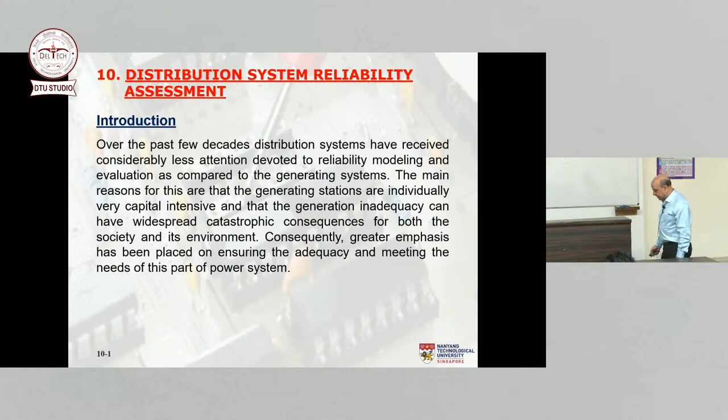Whereas in the distribution system, the outages are localized. Maybe 100 customers, 1,000 customers will be affected. But if there is an outage in generation or transmission, maybe millions of customers may be affected, if not the entire country. So that is a little bit understandable, but that's what has happened. Generation has been the focus of a lot of reliability studies for the simple reason that the outages there can have serious or drastic consequences. But we must realize that many of the outages come from the distribution system, particularly from the customer's perspective.

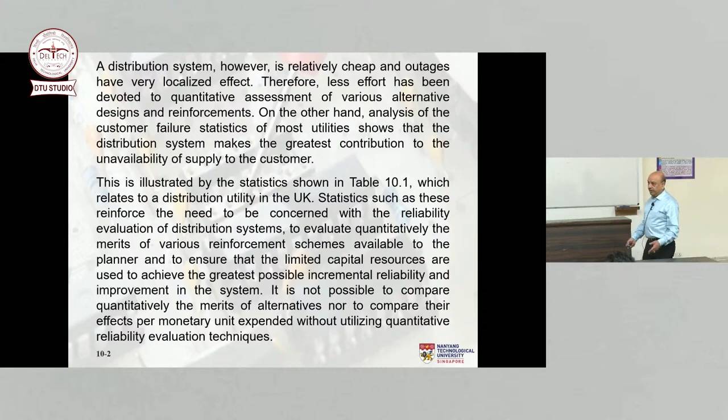So if you look at these statistics here from a utility in the UK taken some time back, you see that 11 kV and below is almost 87%, more than 87%. My own studies when I did during my PhD and a few years after that I continued in the same area, told me that more than 80% of outages in an electric power system come from distribution. Of course, I was using test systems, that's the difference, whereas this is a real system. So you can still see that it's more than 80%.

So from the customer's point of view, they don't care how you reinforce the generation, how you reinforce the transmission. They are only interested in whether they can get power from the utility or not.

So let's look at how we evaluate the distribution system reliability. That's going to be our focus this morning. Usually, most distribution systems are radially connected. Now, the radial system is probably not the most reliable, but it is the most prevalent, truth be told. Some systems are connected to a mesh or a ring. I will talk about that as well a little bit, but to begin with, we'll start with the radial distribution system. So it consists of a set of series components, including lines, cables, disconnects, bus bars, etc.

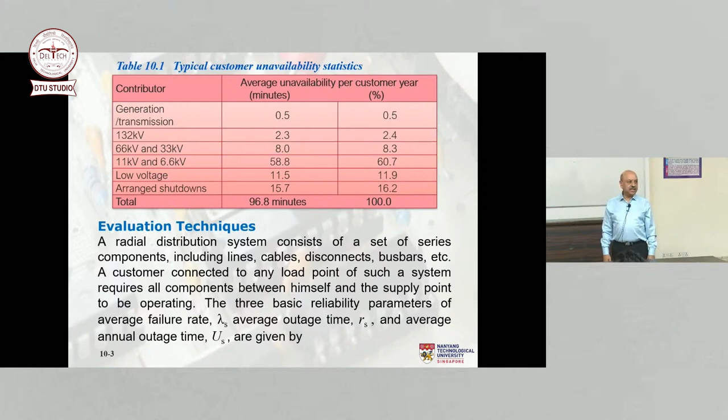So when components are connected in series, we have learned that lambda is equal to lambda 1 plus lambda 2 plus lambda 3, right? And then we can find the R and we can find the U, correct? If components are connected in parallel, we also have equations. We have learned all that in the failure modes and effects analysis, in the minimal cut set technique, and so on.

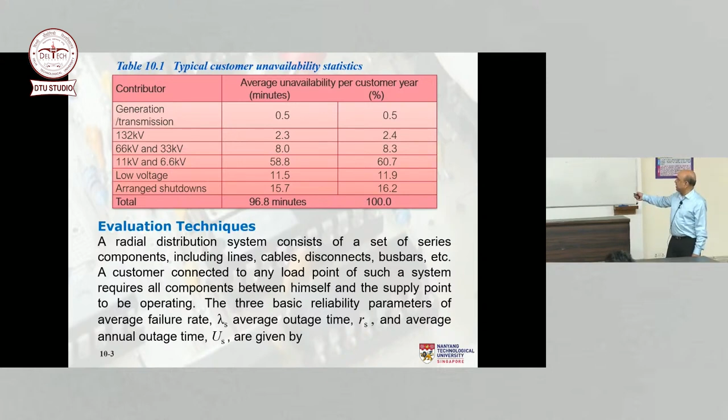So the three basic reliability parameters that we shall calculate in distribution systems, which are not really any different from what we do in generation systems, are the average failure rate, average outage time, and average annual outage time, also known as unavailability. That's why we use U. U stands for unavailability. So unavailability is the annual outage time. R is the average time, whereas this is in hours per year, this is in hours, right? So that's the difference between the two. And lambda is in failures per year or failures per period, depending upon the length of the study.

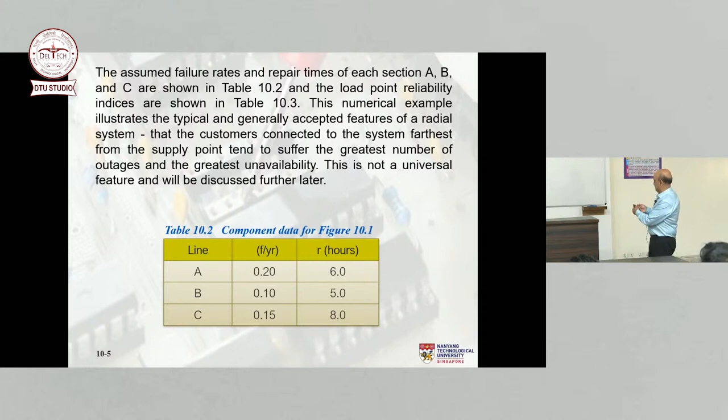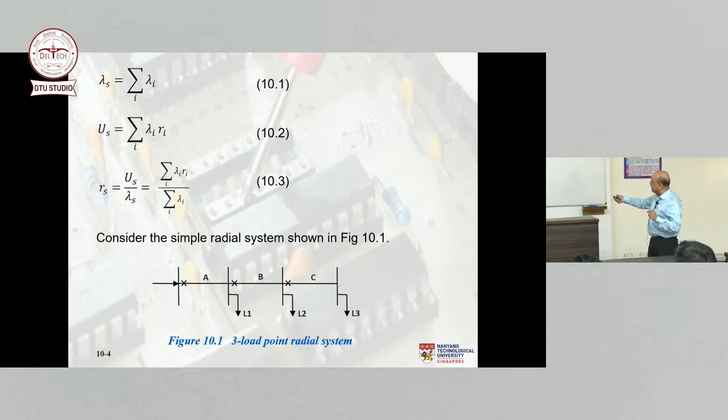Okay, now let's hope it will continue. So load point 1, I was talking about there is a fault here, then you need to repair. So load point 1 is out for 6 hours. It will not get power for 6 hours, correct? And how is it affected by failure rate? The failure rate is the same as the failure rate of component A. And the outage time is 6 hours. Therefore, the unavailability is 6 times the failure rate.

Now let's talk about the failure of section B. If this fails, this breaker will trip and it will not affect load point 1, correct? That means load point 1 can continue to be served. If there is a failure of component C, it will not affect load point 1 either. So load point 1 is impacted only by failures of component A. Load point 2 is impacted by failures in component A and B. And load point 3, poor guy, is affected whenever there is a failure in A or B or C. So the customers that are farthest away from the supply are the worst off. That's how the radial system works, because everything is in series, like we said.

So if we look at the... oh yeah, come on, another hour, just stay with me for another hour.

So the load point reliability indices for L1: 0.2 failure rate for section A, multiplied by 6 hours, the repair time of section A. So the unavailability is lambda times R. For L2, you have to add lambda A plus lambda B. That will be the effective failure rate.

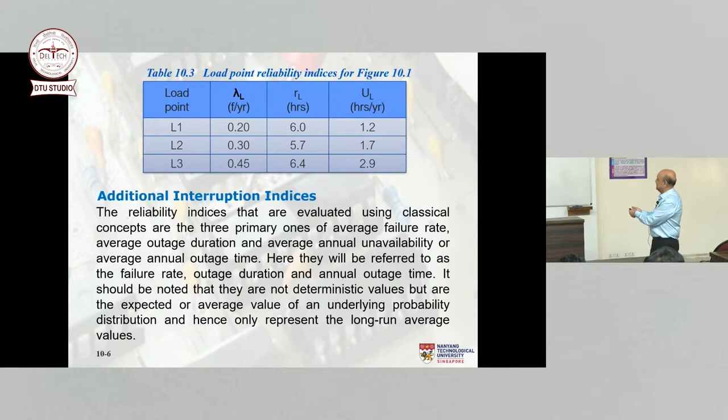And then the unavailability is... let's go back there, unfortunately. This is giving me trouble. Maybe we need to look at it. Probably a battery problem, but reliability, unreliability can come from anywhere.

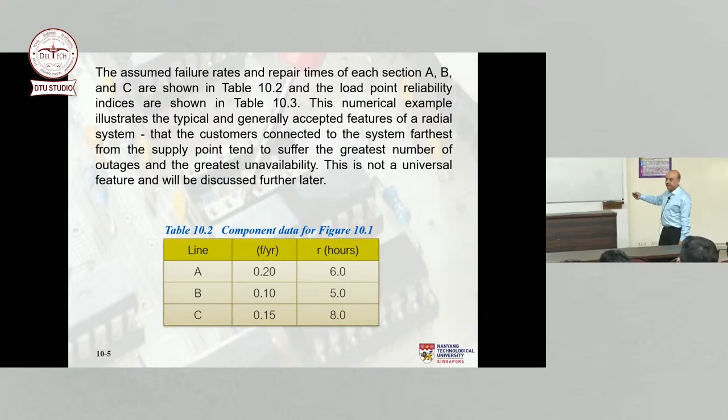Thank you. So for load point L2, what will it be? It will be 0.2 times 6 plus 0.1 times 5. The unavailability, so that's the number that you see here, 1.7. So 1.7 divided by 0.3 will give you the average outage time.

Similarly for load point 3, which is the worst, as you can see. Failure rate is the worst, total unavailability is the worst, as is the outage time.

So in general, when we deal with distribution systems, and some of you may be experts in power quality, you may have heard of indices like SAIFI and SAIDI. Have you? Anybody in power quality area? You have heard about those, right? Yeah, SAIFI and SAIDI are two of the most popular indices used in power quality as well.

So even in reliability of distribution systems, we use additional interruption indices, not just lambda, R, and U, but we also want to calculate additional indices. Why? Because you know the failure rate of load point 1, but does it tell you how many customers are affected? It could be one customer, it could be 1,000 customers, it could be 10,000 customers. Does it tell you how much load is interrupted? 1 kilowatt, 1 megawatt? It doesn't. So that's why we need these additional indices, which give us more information about the performance of the system. Those additional indices are defined here. There are two types: one is called customer-oriented indices, and the other is load-oriented indices.

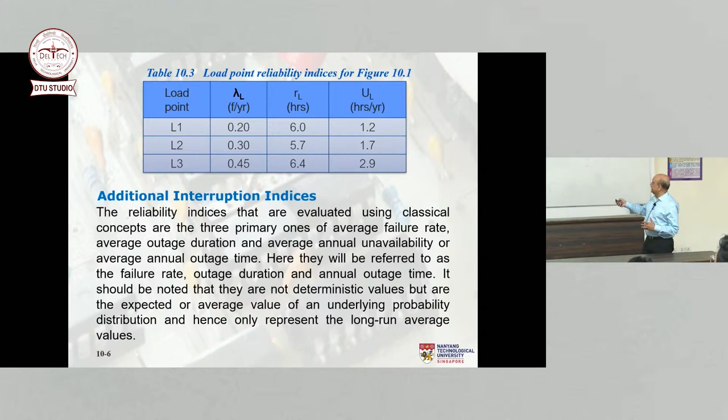SAIFI is the total number of customer interruptions divided by total number of customers served. This is for the system, for the entire feeder. When I showed you the indices of lambda, R, and U, these were for individual load points, L1, L2, L3. Now I want to find the reliability of this entire system, not just for L1, not just for L2, not just for L3.

That's where we come to customer-oriented indices. So total number of customer interruptions, which is lambda times n, where n is the number of customers at load point i, divided by the total number of customers in the system, in the feeder. That will give you SAIFI.

The other more popular one is called SAIDI, System Average Interruption Duration Index. Interruption duration—this one is interruption frequency. So this gives you the frequency, this gives you the duration. Remember, we have been saying from a customer's perspective, frequency and duration are much more meaningful. So here we have sum of customer interruption durations. This one is duration, this one is frequency. Remember, we also said that frequency is equal to lambda—we made that approximation somewhere along the line. So U times N divided by summation.

There is another one called CAIFI, total number of customer interruptions divided by total number of customers affected—not the total number of customers, but only those that are affected by those interruptions. CAIDI is defined like this, which is nothing but SAIDI over SAIFI.

If you look at this, U times N over lambda times N, because the denominator will get cancelled, right? So CAIDI is SAIDI divided by SAIFI. That's another way of calculating CAIDI.

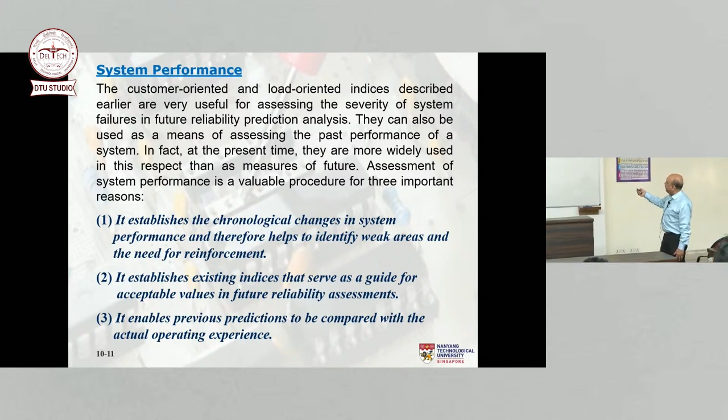In other words, you have your system, you have the failure rate, you have the outage time of the lines and of the bus bars and breakers, and then you want to calculate the performance of the system based on historical data. But you can also do it as a measure of future performance. So why it is being done based on the current system is it establishes the chronological changes in system performance and therefore helps to identify weak areas.

You want to do it so that you know which part of the system is more prone to failures, so you can put more reinforcement there. It establishes existing indices that serve as a guide for acceptable values for future systems. If you don't have anything to go by, how will you plan the reliability in the future?

So at least now you have a guide. You say, okay, this is the reliability of my system. Do I want to enhance it? Do I want to keep it that way? Or can I allow it to degrade? At least you have a general guide.

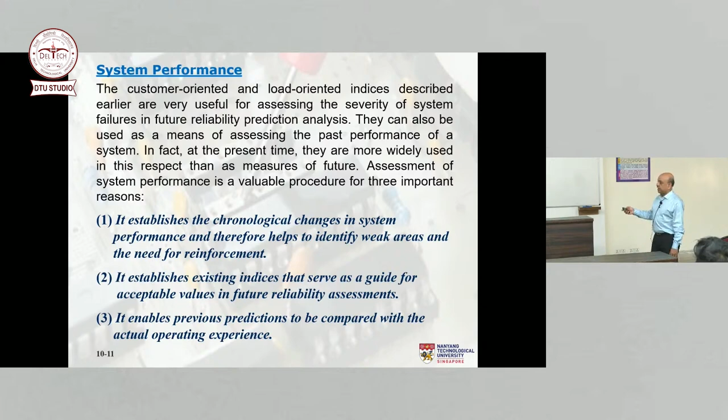And last but not least, it enables previous predictions to be compared with the actual operating experience. You already have your system, you know how it was behaving in the past, and you can now compare it with what happens in the future. So those are some of the ways in which these reliability calculations can help.

So now let's apply it to a radial system. Like we said, many distribution systems are connected radially, and the techniques that we are describing here are used to evaluate the 3 primary indices. What are those 3 primary indices?

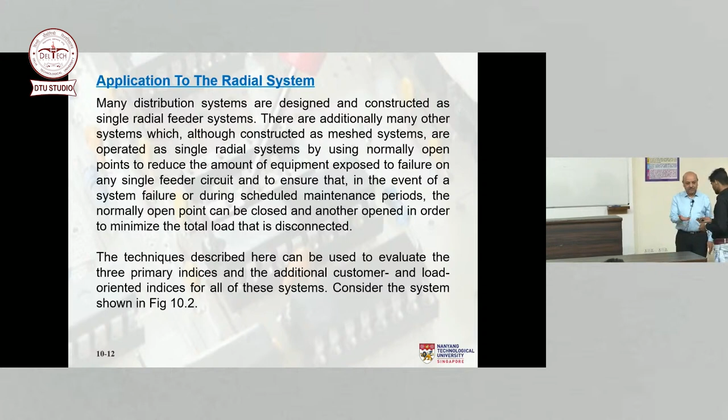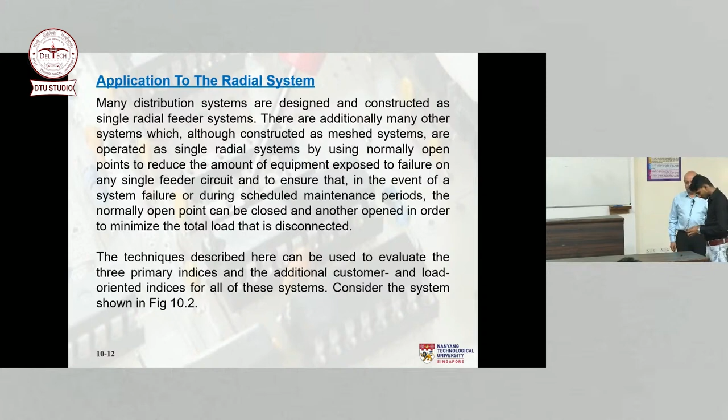Something has gone wrong. I thought it was working now. No, go ahead, go ahead. Thank you.

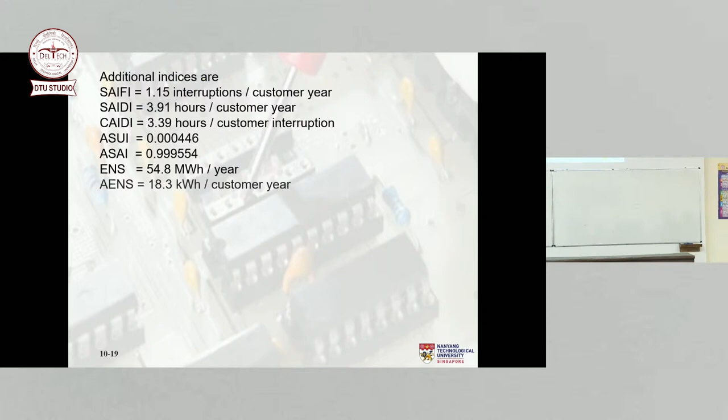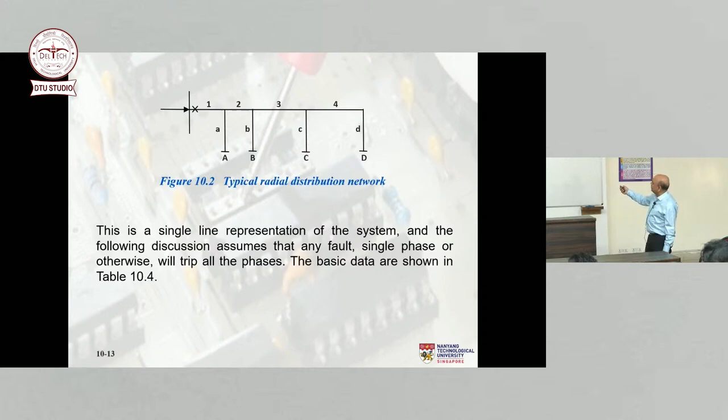Because any failure 1, 2, 3, 4 impacts all the 4. Any failure A, B, C, D impacts all the 4. Therefore, you would expect the reliability of all the 4 load points to be the same, exactly the same. Yeah.

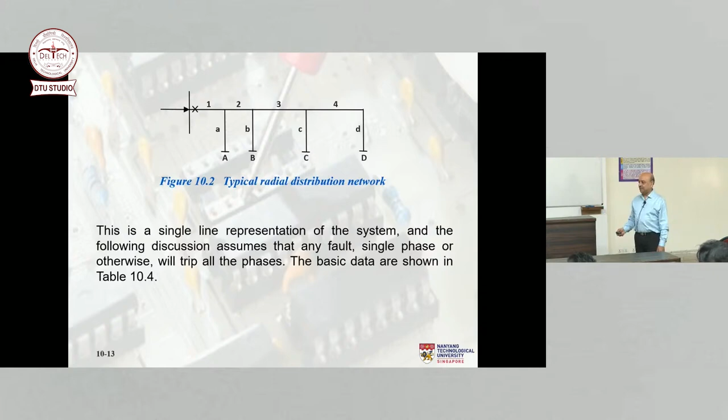So, okay, so I'll show you this table first. The reliability is exactly the same. Okay, we'll go back to the SAIFI SAIDI in a while.

So you see section 1 out, the failure rate is 0.2. Whenever it fails, you need to repair it. The repair time is 4 hours. Therefore, the unavailability is 4 times 0.2. Clear? Whenever section 2 fails, also repair. Section 3 fails, repair. Section 4 fails, repair.

Correct? And then lateral distributor fails, repair, everything is the same. You see the reliability of load point A, load point B, load point C, load point D, exactly the same. It's a highly unreliable system and probably not the best system to have in any radial distribution circuit.

So I have this data here as well. Why? Because we also want to calculate the customer oriented indices and if possible the load oriented and energy oriented indices. So the data is given for all the load points A, B, C, D, the number of customers connected at each of those, and the average load connected at each of those 4 load points.

So you can calculate the SAIFI, SAIDI, CAIDI, ASUI, ASAI, ENS and AENS according to the equations I showed you earlier. Calculations are quite straightforward. Remember the SAIFI equation? You just need to know the equation: lambda I times Ni over summation of Ni.

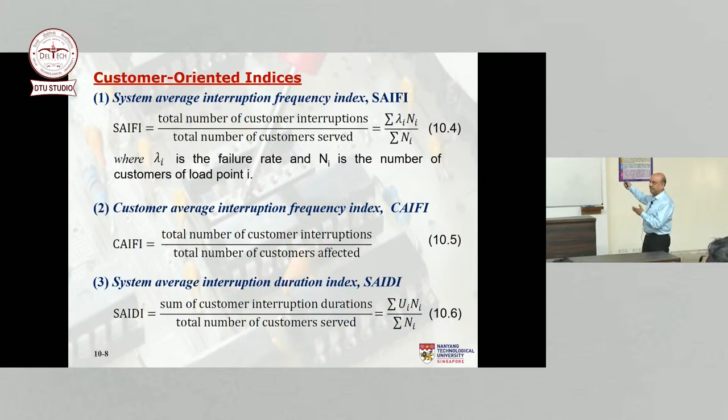Note the units. SAIFI is an interruption frequency index, so it is interruptions per customer year. SAIDI is a duration index, so it is hours per customer year. CAIDI is SAIDI over SAIFI, as I mentioned earlier.

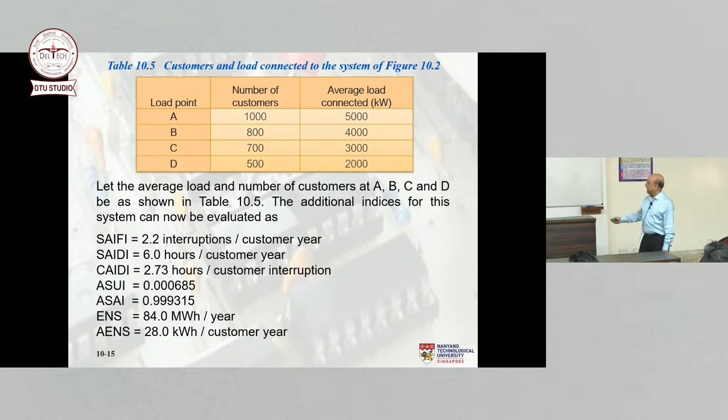And then of course the availability index, the unavailability index — you can see that the system is reasonably reliable, 0.999315. And the energy not supplied, using the equation, because we have the average loads. How do we calculate the energy not supplied? The energy not supplied is average load multiplied by the unavailability. We have the unavailability at each of the 4 load points, and the average load at each of the 4 load points. Just sum them up, and then AENS is just divided by the total number of customers. These calculations are straightforward; I have not shown them in the slides because they are relatively easy.

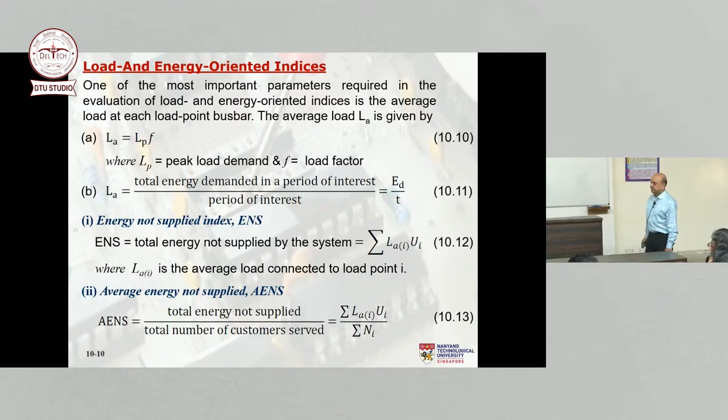Yeah, the lambda is of both section and... no, it's the load point. Now we are at the load point, because this is a system customer oriented index, not the individual section — it's the load point for the distributor, at the load point. So in other words, it's this one: lambda A multiplied by number of customers at A, plus lambda B multiplied by number of customers at B, okay?

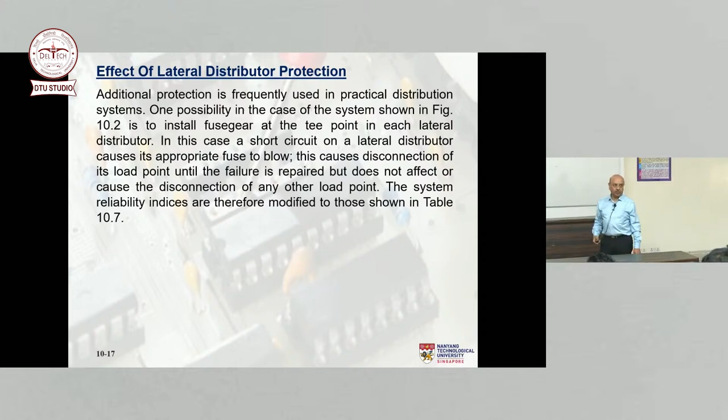Right, so we have seen a very simple configuration, only one breaker. Whenever there is a fault on any main section or lateral distributor, the breaker operates, and therefore we lose power at all the load points. Not the best system to have.

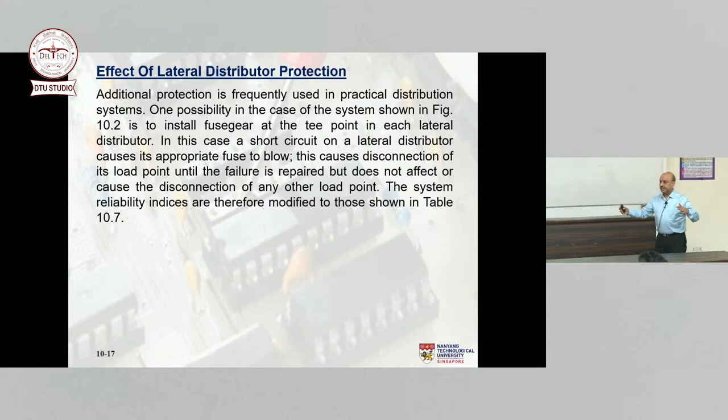So now we are going to consider lateral distributor protection. In other words, for all these laterals — the distributors I mentioned — I'm going to install fuses in each of them, so that whenever there is a fault in a lateral, the fuse will blow and it will not affect the other load points. It will only affect the load point where the lateral is connected. Of course, when the fuse blows, you have to rectify the fault before you connect another fuse and close the circuit for that load point. But it will not affect the other load points, correct? So that's what we have shown here with lateral protection.

You see, for the main section, no change — whenever there is a fault in the main section, the breaker will operate and you can't get any supply, right? But for the distributor, previously we had all 4 entries, but now we don't. Why? Because in its own lateral, if the fuse blows, there is a fault, you have to repair it. But if lateral B has a fault, the fuse blows, it does not affect load point A. Lateral C does not affect load point A. Lateral D does not affect load point A, correct? Then you come to load point B.

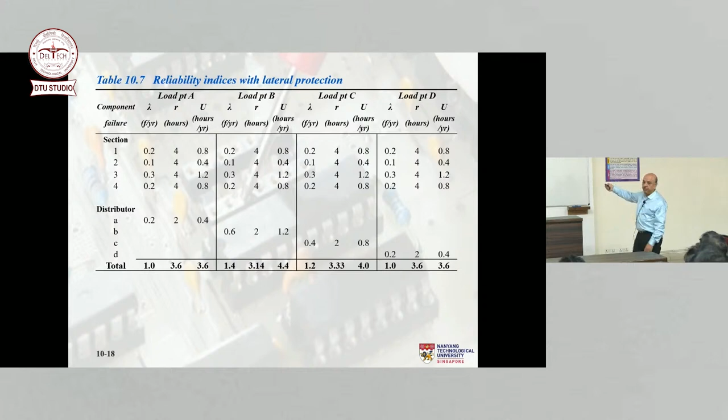For the main section, no change. For distributor A, if there is a fault, the fuse will blow, and therefore it will not affect load point B, it will not affect load point C, it will not affect load point D. So there is only one thing that will affect it from the distributor side, that is its own distributor — load point A's distributor or load point B's distributor — because its own fuse will blow, you have to repair the distributor before you put another fuse and close the circuit, okay? So this is obviously more reliable compared to the previous configuration.

So what do you see now? Failure rate is only 1, 1.4, 1.2, 1, and the unavailability is 3.6, 4.4, 4.

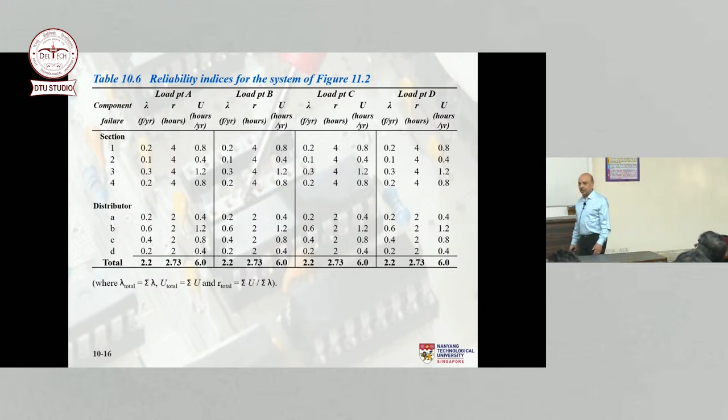Now compare this, try to remember 1, 1.4, 1.2, 1 - I need to keep going back and forth. You see here 2.2 repeated - all of them were equally reliable, or equally unreliable. But now we have improved: 1, 1.4, so the failure rate has gone down, which is good. What do we want at the end of the day? Failure rate should go down and unavailability should go down, because the repair time R is U over lambda, a ratio of two quantities. We can't control that directly, but if we control lambda and U, then R will subsequently also reduce.

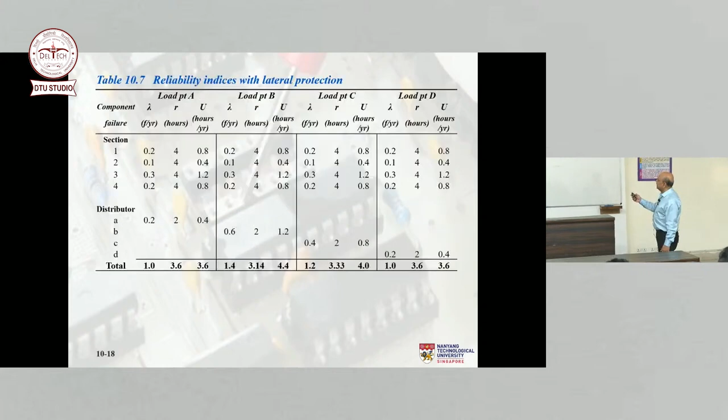Clear? So that's the lateral distributor. I connected some protection in the laterals and the reliability has improved. You can calculate the additional indices and you'll find they have also improved. Now we do something else, because that system is also not as reliable. So we are considering something else, and I'm going to show you the drawing first.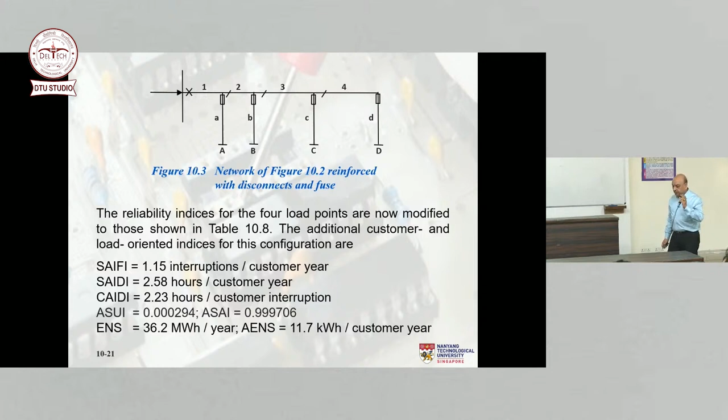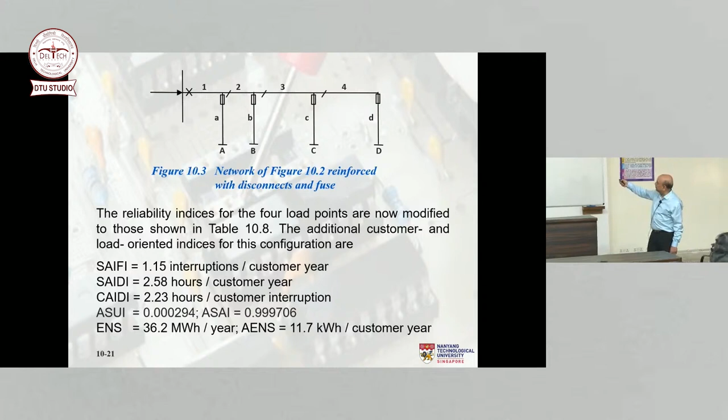There is a breaker as before, and fuses in each of the laterals. In addition, I have put this disconnect - just a switch that can be opened or closed. It's not a fault breaking switch, meaning it's not a breaker, so you have to operate it manually. We call it a disconnect. There is one at the beginning of section 2, one at the beginning of section 3, and one at the beginning of section 4. I don't need one at the beginning of section 1 because there's already a breaker there.

So we are slowly enhancing the system in the hope that reliability will improve, and of course it should - by how much is where reliability evaluation techniques come into play. So what happens in this system now? If there is a fault in section 1, the breaker will operate - load point A is out, load point B is out, load point C is out, load point D is out. So the main section is still the same.

But what happens if there's a fault in section 2? The breaker will go off, of course, but while things are off, you can open this disconnect and then close the breaker so that there can be power to load point A. Are you with me?

So for any fault here, now I don't need to repair section 2 for load point A to get power back - I don't need to repair, I only need switching action. I need to switch the disconnect on and off, and that switching time is usually much less than the repair time of the component. So I've used a switching time of 0.5 hours as opposed to the repair time of this section, which was 4 hours according to our data.

Similarly, if there is a fault here, the breaker will go off, then I use this disconnect, open it up, and close the breaker. So load point A and load point B are now supplied - only load point C and D are disconnected. Similarly, for a fault in section 4, only load point D is impacted; the other three can be recovered after the switching time of 0.5 hours. So we see that this situation is also very nice.

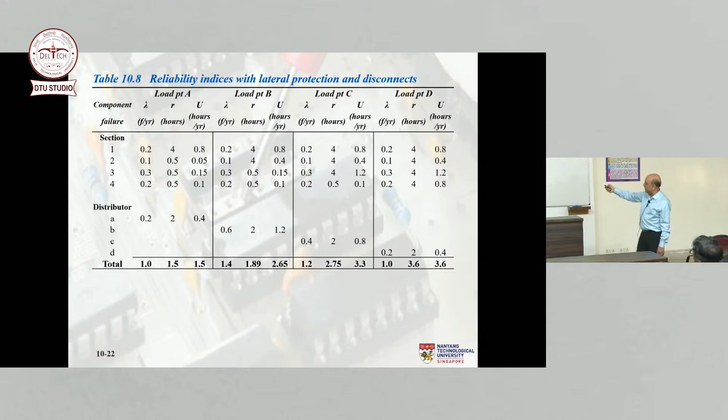Okay, so let's come to load point B. First section failure, you need to repair. Second section failure, you need to repair too, right? If you're still not sure, let's go back. Now we're looking at load point B - if there's a fault on section 1, breaker goes off, you have to repair section 1, no choice. If there's a fault on section 2, breaker goes off, but you can't open this disconnect because you still cannot supply load point B, so you have to repair section 2.

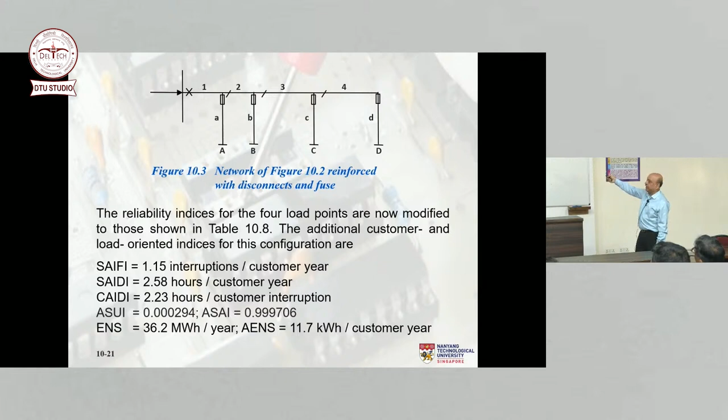When you come to load point C, you can isolate from here if there is a fault on section 2 or section 1, and then reclose the breaker. So A and B can be supplied if there is a fault here or a fault here, and so on. That's how we arrive at this.

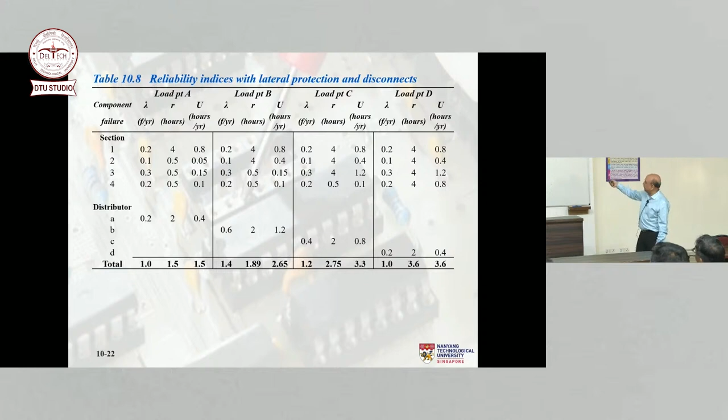The lateral distributor has only one entry, and for the main sections, for B, only the first 2 components need repair, the other 2 can be switched. For load point C, the first 3 components need to be repaired, the 4th can be switched. The last load, nothing helps, because there is only one breaker and you can't connect the load from other sources.

Again, you can calculate the SAIFI, SAIDI, CAIDI, and ASAI, ASUI, ENS, and AENS, etc.

Now we have done a few cases. We have seen the impact of protection failures. We have seen the impact of disconnects. But let's go back to this protection failure.

There is a fuse in the distributor. Who's to say whether the fuse will operate whenever it is called upon to operate? You tell the fuse, hey, it's time for you to kick off because there is a fault, and it refuses to operate. So it has its own reliability, right? So we are going to consider that now. That's why this can be very interesting—you can include almost everything under the sun.

So occasionally the primary protection system fails to operate. What's the primary protection for the load? It's the fuse, that's the primary. The breaker is the secondary protection. So occasionally the fuse refuses to operate, and then you have to go back to the backup protection.

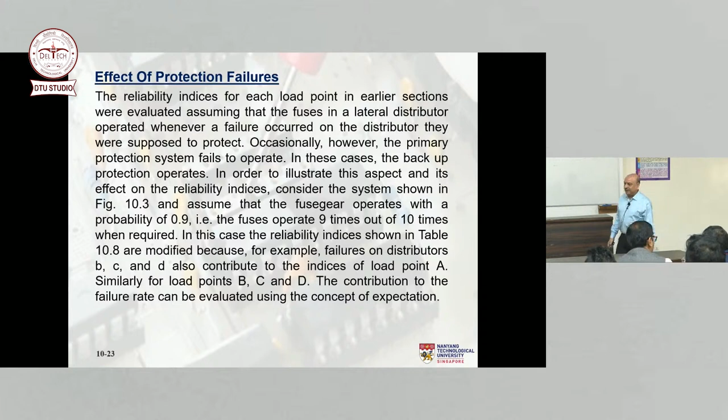So we are assuming now that the fuse gear operates with a probability of 0.9. Of course it should be quite reliable. If you say the fuse operates with a probability of 0.1, then what's the point—might as well not have it. The other 0.1 is so bad. So usually it is expected to have a high reliability. So I'm using 0.9, meaning the fuse operates 9 times out of 10, in simple layman terms.

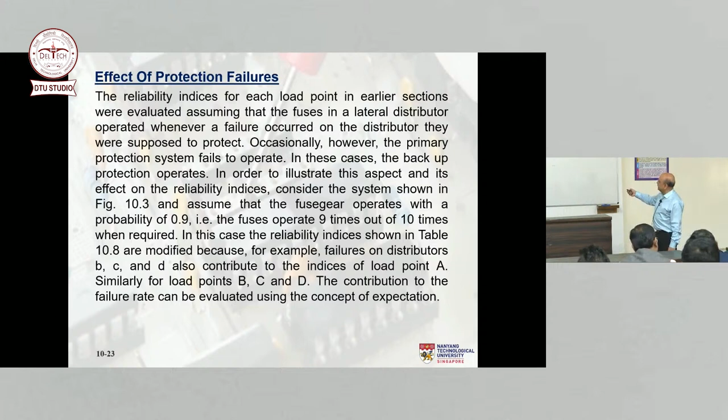So in this case the reliability indices can be modified, let's look at that. We need to find the effective failure rate using the concept of expectation. I've been using that word for the last 3-4 days—expectation, mean, average. So we say, what is the failure rate if the fuse operates, multiplied by the probability that the fuse operates.

This is conditional probability. So the failure rate when the fuse operates is 0. If the fuse is operating, then there is no failure, multiplied by the probability the fuse operates, that's 0.9. And the failure rate when the fuse fails, multiplied by the probability of fuse failure, which is 0.1, gives the failure rate given the fuse fails—the contribution to load point A by distributor B.

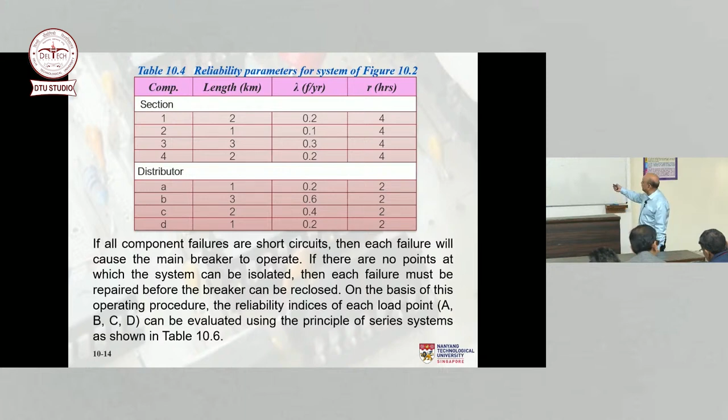So let's go back to the data of distributor B. You see here, the failure rate is 0.6. That particular distributor has a fuse, and now because the fuse may not operate whenever it is called upon to operate, this lambda needs to be modified. The failure rate is no longer 0.6—it becomes different. That's what we have done using this conditional probability.

So 0.6 times the probability that the fuse fails gives us 0.06. So now let's look at the reliability of each of the load points.

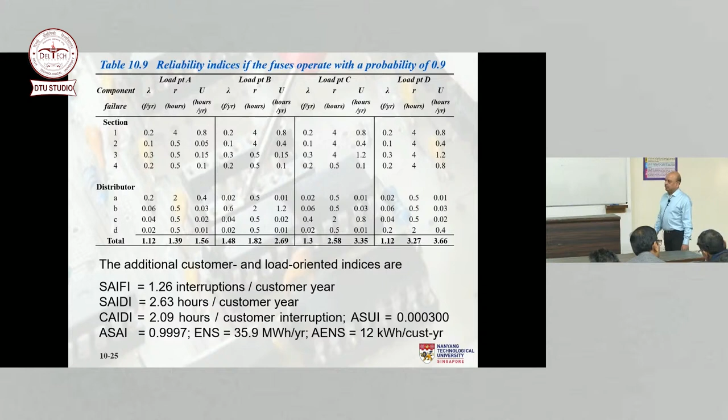So what happens when section 1 fails? Of course you need to repair it. When section 2 fails, you can switch using the disconnect. For sections 3 and 4, this one is the same, no impact.

Then we come to the distributors. For load point A, I'm only going this way now, just focus on this side. So distributor A fails, you've got to repair it, no choice. Distributor B fails, now you can switch it.

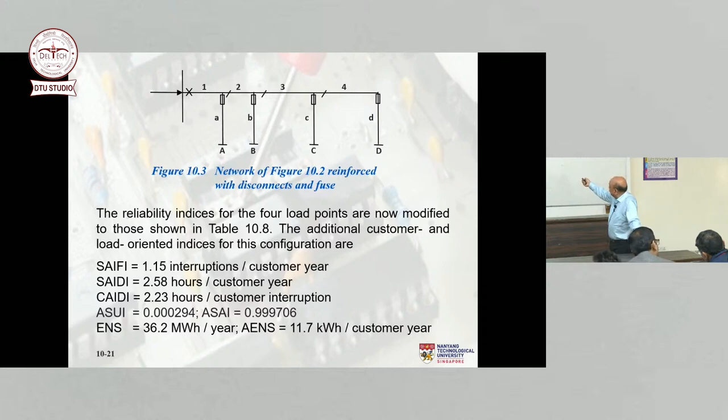Where is our system? So distributor B, there is a fault, the fuse will fail, and the fuse is there, and therefore load point A is not affected—in fact you can switch, there is a disconnect here. So even if this fuse fails to operate, you can use the disconnect. So you will see that it is only the switching time, 0.5.

Same for lateral C, same for lateral D. Then for load point B, first section, repair. Second section, repair. Third section, you can switch because there is a disconnect. Fourth section, you can switch because there is a disconnect. Then the laterals—lateral A, you can disconnect, 0.5 switching, but lateral B itself, which is feeding the load, you have to repair. And the others will also be switched.

So this is how we incorporate it, but you should notice the lambda here—that's the one to notice, 0.06.

Given that the fuse may fail, you need to use the modified failure rate. So we didn't use the original failure rate, we used the modified failure rate: 0.06, 0.04, 0.02. That's how we will calculate the reliability indices for each of the 4 load points, A, B, C, D.

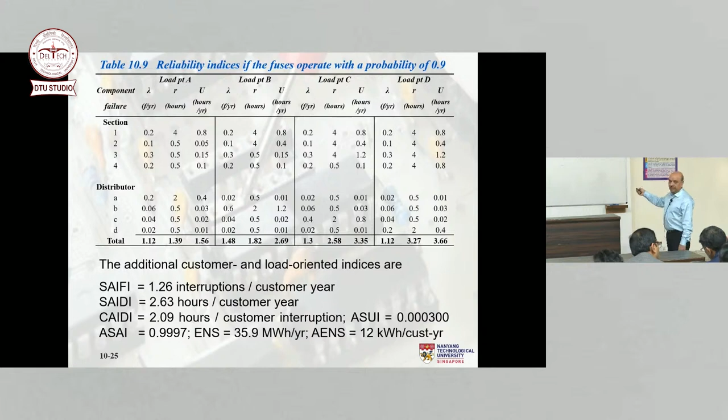If you now compare the reliability of each of these 4 load points, just try to remember load point A is 1.12, 1.56. It's worse off, right? So the reliability has deteriorated. You would expect that because the fuse is operating only 9 times out of 10, not 10 times out of 10. So you can see the impact numerically, analytically, how it impacts the numbers.

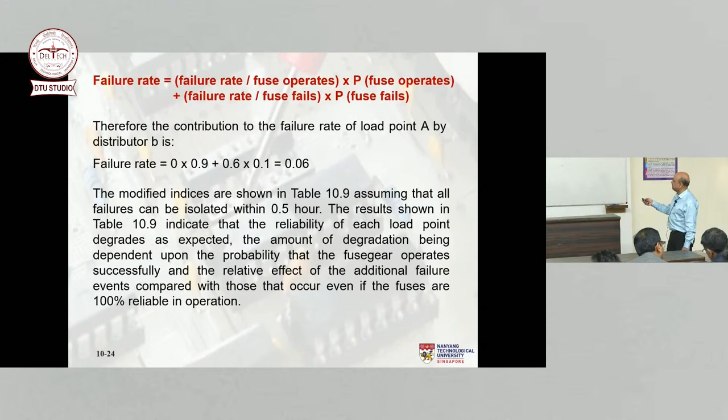So for reliability indices, you can also calculate the customer-oriented indices as well.

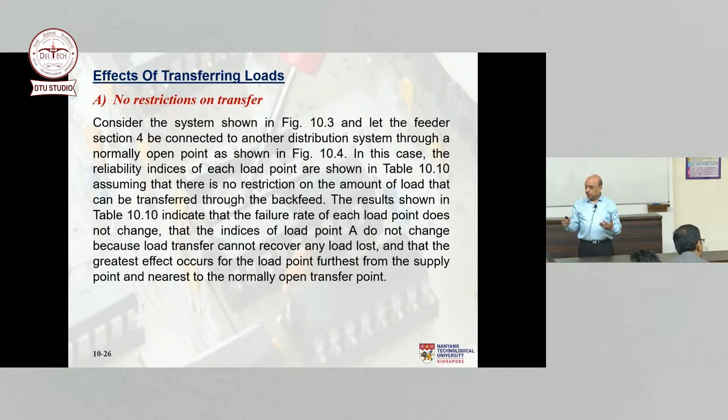Now the last case: we haven't yet considered any supply from the other side. We say only supply is coming from here, and then the radial feeder is going like this. Now suppose at the end of this radial feeder I have a normally open point, and there is something else here, either in the form of a mesh or a ring or whatever, which I can use as a backfeed. Meaning in the hour of need, if I close this switch, I can get power back here, as long as I don't create a fault while doing so. So you have to do it carefully, of course. So this changes the paradigm completely, because now I have got another source of power, and we can expect the reliability to improve. So this is what we are after now.

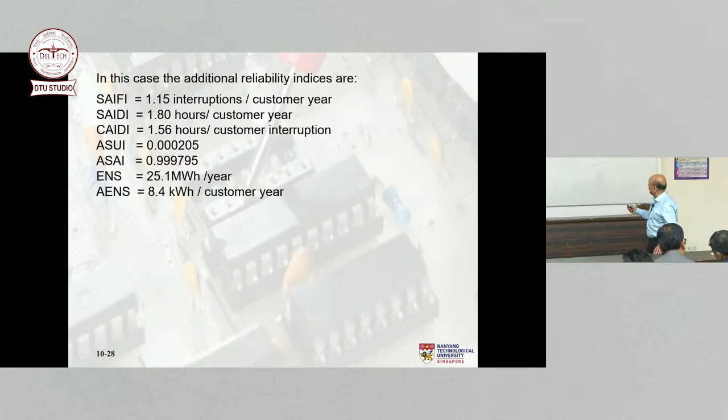Transfer restrictions: we want to see how the transfer takes place. Here, no restrictions on transfer first, and then we will assume some restrictions on transfer. So this normally open point will supply power whenever you want it to, no restriction. That's the first case. Then we'll see how the restriction case happens.

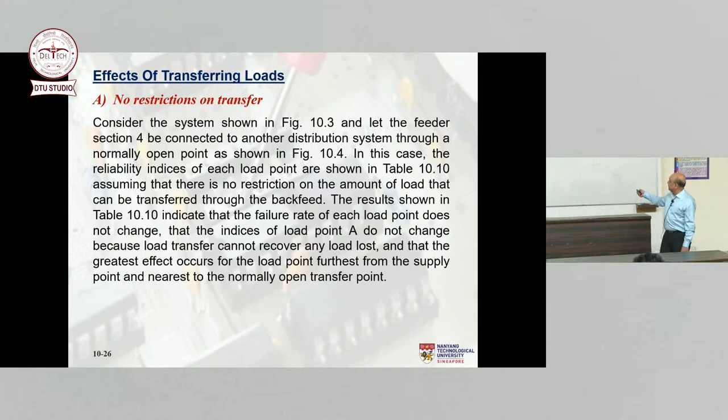In this case, the reliability index of each load point is shown in the table, and this indicates that the failure rate of each load point does not change. However, the indices of load point A do not change because load transfer cannot recover any load.

So even if I get power from here, suppose there is a failure in section 1, this breaker will go off. Can I provide power from here to load point A? I cannot, because there is a fault in this section. The minute I try to provide power through this, the fault will be there again - I'm reconnecting the fault. So load point A cannot benefit from this normally open point, the backfeed, the alternative power supply. But all the other load points will benefit.

For example, load point B: if there is a fault in section 1, the breaker goes off, you use this disconnect, open it, connect this normally open point, close it, and then you get the power to B, C, and D. So in this case, load point D stands to benefit the most. In the previous case, when this backfeed wasn't there, D was the worst - now it is the best. Why? Because right next to it, there is another source of power. So this is how we can quantify it.

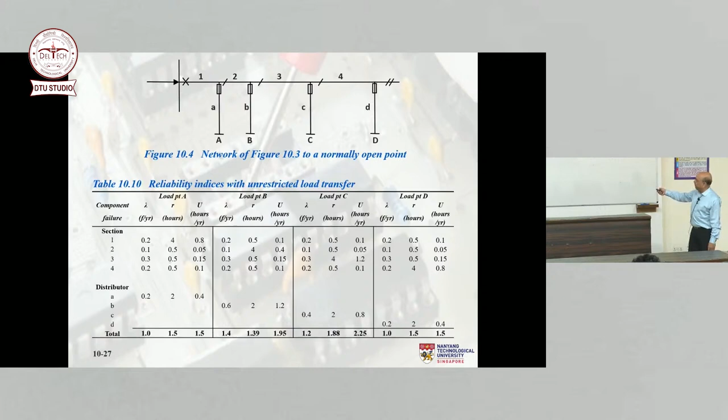Where is the table? Yeah, it's right here. So for load point A, if section 1 fails, you've got to repair it. If sections 2, 3, or 4 fail, you can connect the alternate supply just by opening this, keeping this breaker open, and then you can feed power to load points B, C, and D. So each of these you can feed. Section 1: repair. Section 2: you can switch off. Section 3: you can switch off. Section 4: you can switch off, 0.5 hours.

For load point B, section 1 you can switch. If there is a fault here, the breaker will go off. Now you use this disconnect, open it, and then close this, and you can feed load point B.

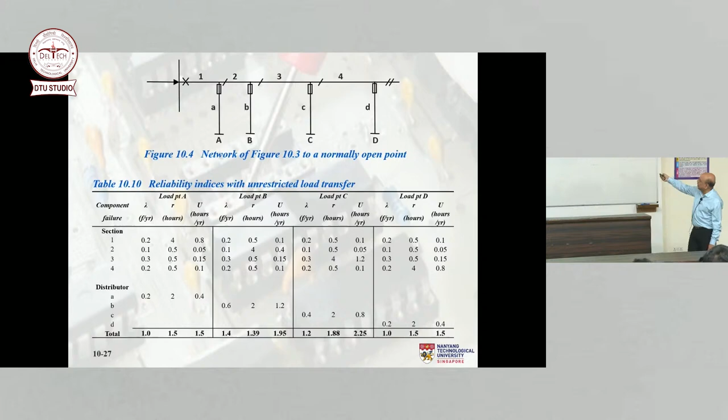So the outage time is only 0.5. But when there is a fault here itself, you've got to repair it. Then the fault in section 2, you got to repair it. Fault in section 3, the breaker will go off, you open this disconnect, you connect the power from here, so it's only the switching action, correct?

Why? You can always ask that question, why? Because nobody thinks of the distribution system as critical. That's the reason. Otherwise, they should not be connected radially. Radial configuration is not good for the customers.

And regarding the protection device coordination, that global point was, if that fails, then the whole system will be blackout. No, if there is a fault here, this breaker will trip, right? Yeah, breaker will trip, supply will be disrupted. Yeah, supply is disrupted here, yes.

And next you have told me we will put the various feeds so that you can coordinate further. Yeah, so we are feeding it from here. Yeah, we are feeding it from here.

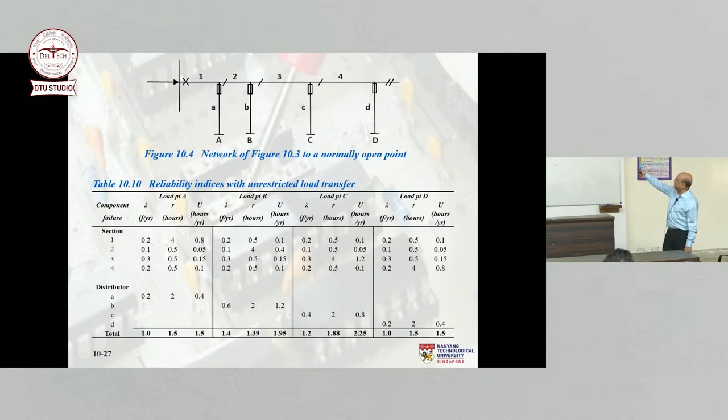Right, in the process, the industry and all these things, they have to have the coordination. Right. Yeah, I mean you're talking about protection coordination. Yes, that's correct.

Yeah, I mean, like I said, most radial systems are connected like that. So there is a way for us to calculate the reliabilities of these systems, also for the ring systems, which hopefully we'll find time for.

I don't know what the time is like. Do we have time for that? It's 11:18, I'm supposed to finish by 11:30. There is tea after that and then the exam. The dreaded exam, right? So where was I?

Yeah, the last case is transfer restrictions. So just now I assumed that whenever I needed to close the normally open point, I was able to without any restriction, and I could get the power from the other side. But suppose the power from the other side is not there whenever you need it. Maybe they are feeding their own feeder, maybe they have limited capacity, maybe they have a fault in their own system and they're not able to.

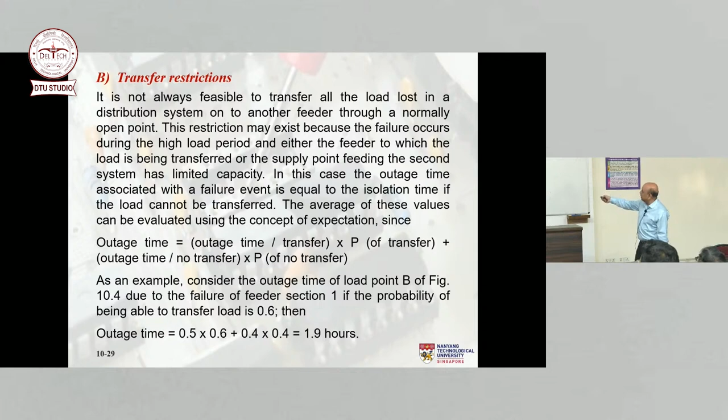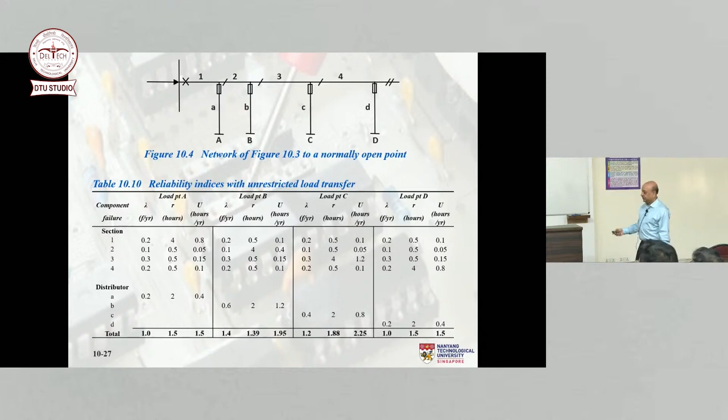Probability, well, outage time given no transfer - if there is no transfer, then it will be out for 4 hours, isn't it? Because you are repairing the main section. So it's not 0.4, it is 4.0. This number is correct, but the decimal got changed, it should be 4.0 times the probability of no transfer, which is 0.4. So it is now 1.9 hours the outage time, and we need to consider that when we calculate the reliabilities.

So this is how it works out with restricted load transfer. Section 1 for load point A - for load point A, section 1 you need to repair. Sections 2, 3, 4 you can switch. Distributor A, no impact. So load point A, no change whatsoever.

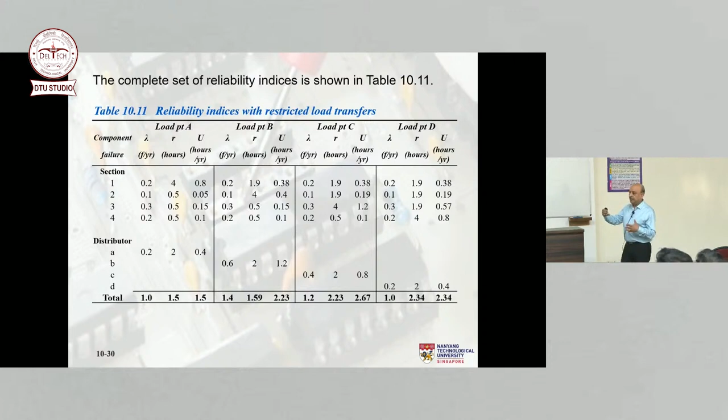Load point B, main section 1, use outage time 1.9, not 4.0, because there is a possibility of transfer, even though it is restricted. Remember in the previous case, this number was 0.5 when the transfer was 100% available. But now we have only a 0.6 probability of transfer. That's why the outage duration is 1.9. The rest remains the same.

Same thing here for load point C. The first two segments will be 1.9, 1.9. And for load point D, the first 3 segments will be 1.9 each.

The lateral distributor is not affected at all by this transfer of power. It's only impacting the main sections, isn't it? Yeah, because the laterals are protected by the fuse. If you want to consider the fuse probability also, that is another element. So I'm considering one by one, not everything together, just to show you the impact of each one of those variables.

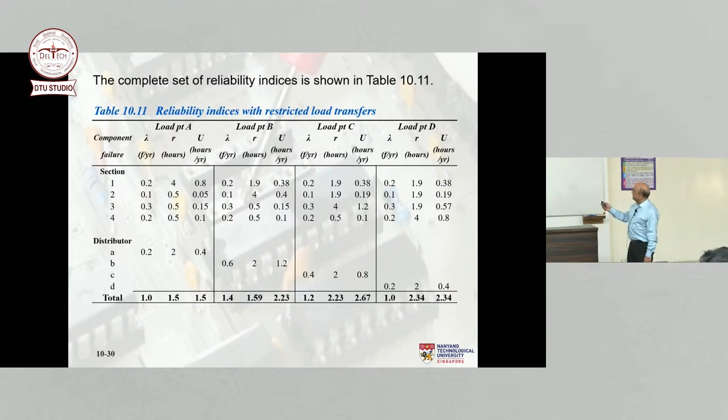I think this is the last slide for this session. You can calculate the reliability indices. If you give me another 15 minutes, I have another set of slides, but if not, we can stop here. It's entirely up to you. We like to tease students whenever it comes to exams, so I'm just doing that.

I'm sorry, the lady here has gone back to fetch her laptop, so she's going to miss a few minutes, but maybe you can tell her later on.

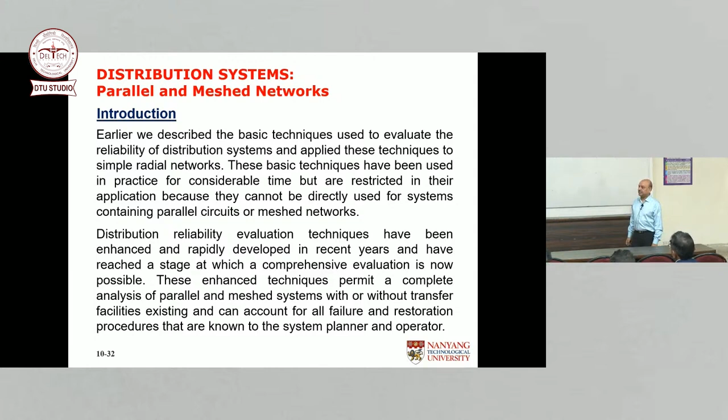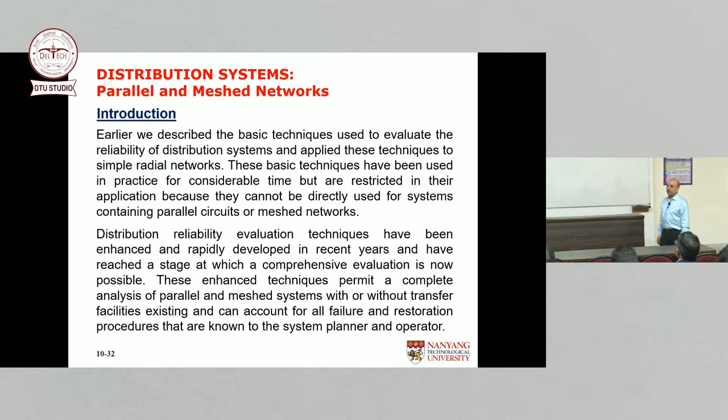So we have so far talked about radial systems. I thought I'd also show you a little bit about how we deal with meshed systems and ring systems. We have described the basic techniques for reliability of distribution applied to simple radial networks. These techniques have been used for a very long time, but they are restricted in application because you can't apply them to meshed networks or ring networks. So now we want to study techniques we can use for ring networks, which are very useful to system planners and operators.

I'm considering bus bar 5 and bus bar 6 to be fully reliable. The reason is simple: if there is a failure of bus bar 5, everything fails, right? So it is a first order failure. If you remember the minimal cut set technique, it's a first order failure. Similarly, bus bar 6 is a first order failure. So you can maintain them, and you need to make sure that when you maintain bus bars 5 or 6, you inform your customers and shut down, giving them a certain notice. That's fine, that will be called a maintenance outage, not a forced outage. We are dealing with forced outages, random outages, in this particular course.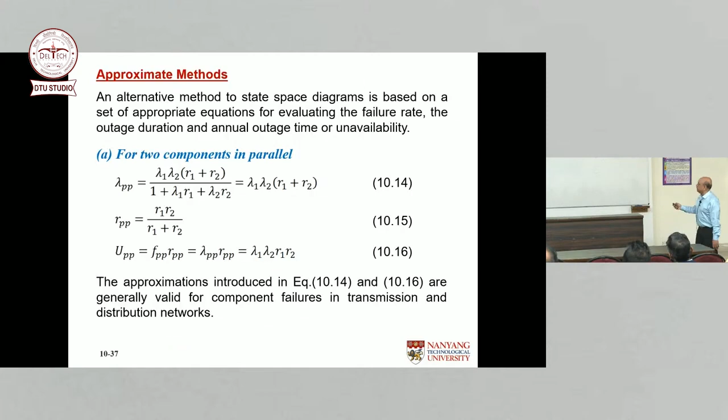And for two components in parallel, we use these equations. And of course, if there are three components in parallel, we also know the equations. The network reduction method says you combine components in series where possible, and in parallel, and then calculate the reliability. This method can only be used provided components are connected in series or parallel. Otherwise, we should use the minimal cut set method, which we now hopefully love very much. Or I believe that you do, right? I always do, but I hope that you do too.

So in this case, network reduction: 1 and 3 are in series. Let's go back again. 1 and 3 are in series, right? So what's the effective failure rate of this? Lambda 1 plus lambda 3, series, correct? Similarly, 2 and 4 are in series. So that's what I have done. I have calculated the lambda 1,3 by adding the two failure rates, and then unavailability accordingly.

Similarly, then the two elements are in parallel: 1,3 and 2,4 are in parallel. So total permanent overlapping permanent, lambda PP - the first feeder overlapping a failure in the second feeder - and you can use the parallel equation for two components in parallel, and you will get the lambda, R and U. So the main disadvantage, as I said, is that components must be in series or parallel. But this is just to illustrate that there is a method which can be used.

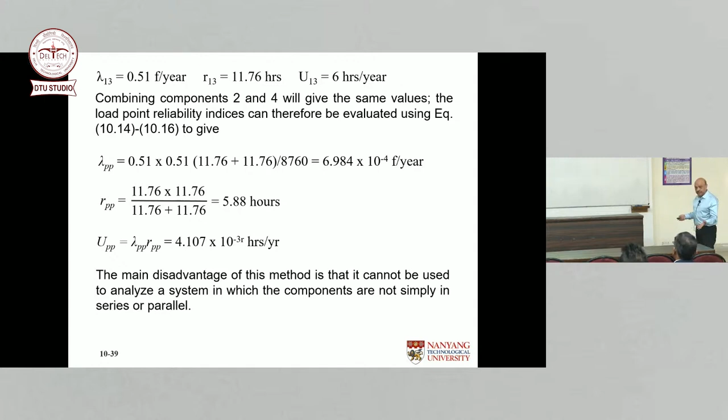So, failure modes and effects analysis. Do you remember the minimal cut set technique? What does the minimal cut set technique say? That the elements of a cut set, all of them must fail in order for the system to fail. And the system can fail if any cut set fails, right? So the cut sets are in series, and the elements of the cut set are in parallel. I hope that you still remember - a test is coming up very soon, right? So that's what we are going to use.

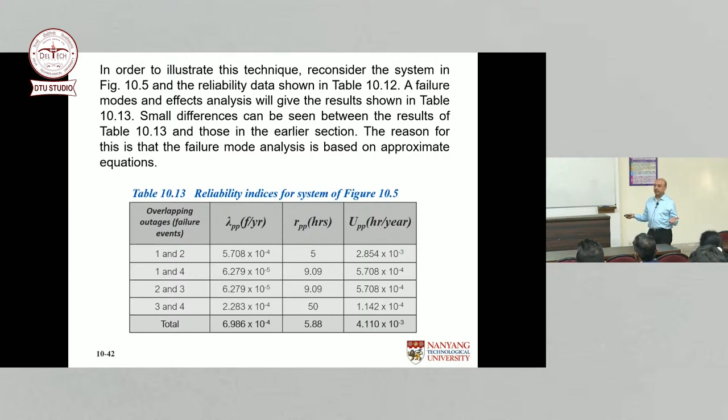Okay, so it can be done - two outages, permanent outages, we call them forced outages, overlapping one another. Please remember, overlapping, they're not happening at the same time. If events happen at the same time, it's called a common cause failure. For example, if there is a fire in a generating station, then all the generators can go out at the same time - that's a common mode failure or common cause failure, must be treated separately.

And finally I have this inclusion of scheduled maintenance, as I promised. We also spoke about it a little bit yesterday, how we can include maintenance in the reliability evaluation of generating systems. Now we see how it can be done for distribution systems.

So a scheduled maintenance outage is one that is planned in advance, we know that, and can be deferred if necessary. I mean, maybe you have planned it to happen from March 8 to 10, and yet you see that your system is now vulnerable. You say, no, I can't do the maintenance now, I will defer by a week or 10 days, right? So it should be deferable.

It should not be like cast in stone, as we say, and involves the removal of a component or components in order to perform preventive maintenance. So when we say maintenance, we use two words: preventive maintenance and corrective maintenance. Corrective maintenance is repair. Preventive maintenance is to keep everything in good state so that it continues to perform very well. So right now we are talking about preventive maintenance, not corrective maintenance - that's the repair. We already know the repair process.

So a scheduled outage is not usually included in the reliability evaluation if by that action alone the load point is disconnected. So I gave you the example just now in the circuit - bus bar 5 and bus bar 6, they are first order failures. So I will not perform scheduled maintenance on those bus bars because by that action alone, I'm disconnecting the load, right? So that's something that we need to be very aware of.

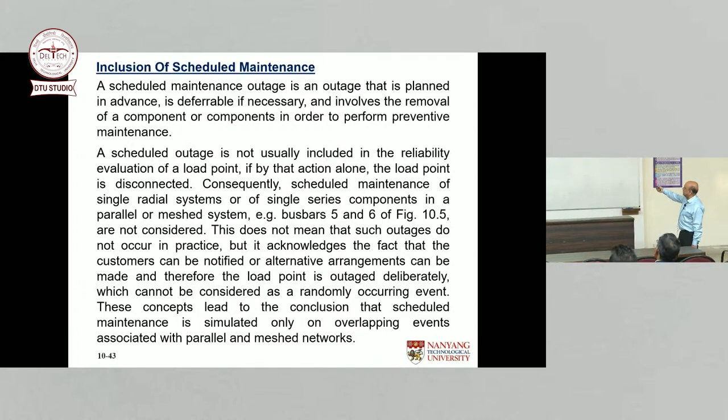Consequently, scheduled maintenance of radial systems or of single series components, example bus bar 6, are not considered. Of course, this does not mean that we'll never maintain them, but as long as you inform the customers in advance and things like that, okay?

So how do we evaluate? Let lambda I double prime and R I double prime be the maintenance outage rate and maintenance time of component I. Of course it's mathematical, I can't run away from mathematics, I try to keep it very simple. So I'm going to perform maintenance on a component I - I will need to know what is the rate at which I maintain component I, and whenever I maintain component I, how long do I take to maintain it? So that's lambda I double prime and R I double prime, okay?

And lambda J and Rj are the forced outage failure rate and repair time of component J. Now this is the normal failure rate and repair time that we are used to. All this while we have been saying, oh, what is the failure rate, what is the repair time, right? So those are the normal ones that we are familiar with.

And now we introduce another one: lambda PM, RPM and UPM. So what is lambda PM? It's the failure rate of a permanent outage overlapping a maintenance outage.

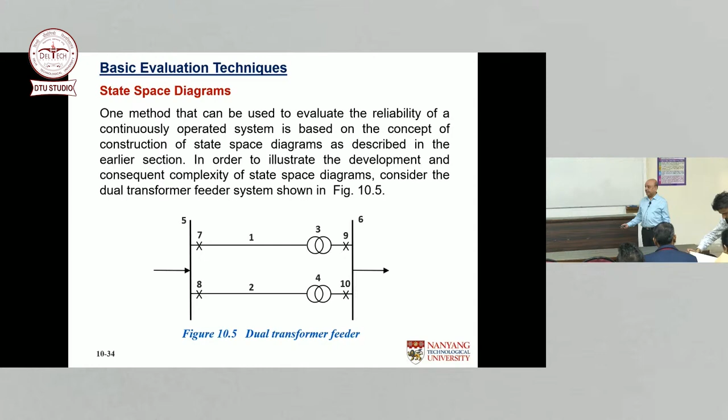So this is what we call a permanent outage being overlapped by a maintenance outage, right? So that is why we call it lambda PM, UPM, RPM - permanent and maintenance outages overlapping. They don't occur at the same time, it doesn't make sense, otherwise we will never maintain them, if by that action alone we find that the load point gets lost or doesn't get the power.

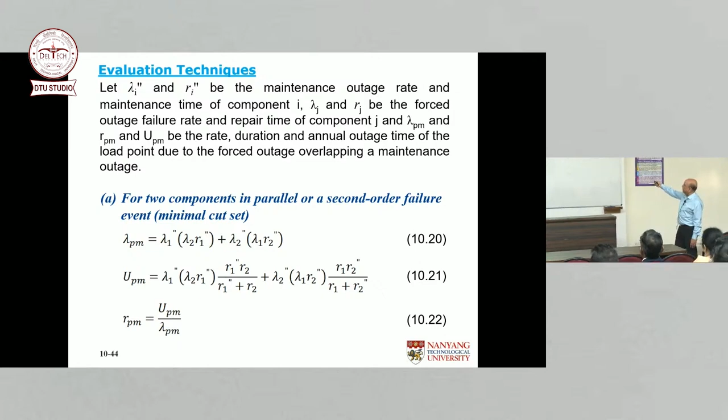So come back to that equation. Lambda PM, R PM, U PM are the outage rate, duration and annual outage time of the load point due to forced outage overlapping a maintenance outage. That's why it's PM, forced outage overlapping a maintenance outage, not the other way around.

Not the other way around. It cannot be MP, right? It has to be that you were maintaining something and then a permanent outage happened, rather than a permanent outage has already happened and you're also trying to maintain. I hope you are with me, right? Yeah, that's disastrous. So it will not be the other way around.

So for two components in parallel, or a second order failure event, minimal cut set, lambda PM - I explained this sometime back when we were talking about minimal cut sets, not sure if you remember. Component 1 is out due to maintenance, lambda 1 double prime - please note. I'm trying to tell you how to get these equations. Component 1 is on maintenance, and when component 1 is on maintenance, component 2 fails during the maintenance time of component 1, clear? Then obviously the other outage is also possible, right? Component 2 is on maintenance, and during that component 1 fails during the maintenance time of component 2, clear? Same thing of course can be extended to 3 components in parallel, right?

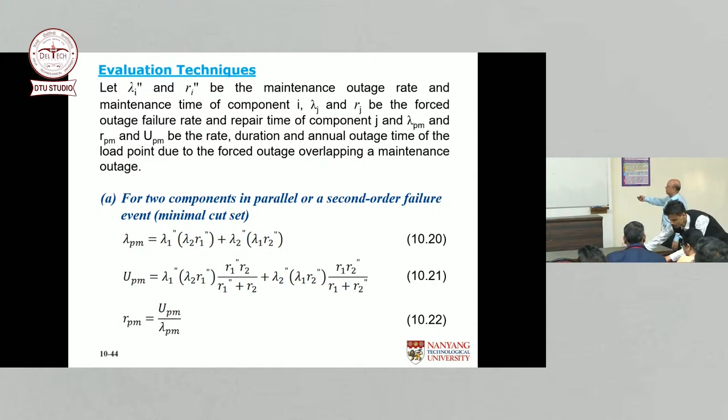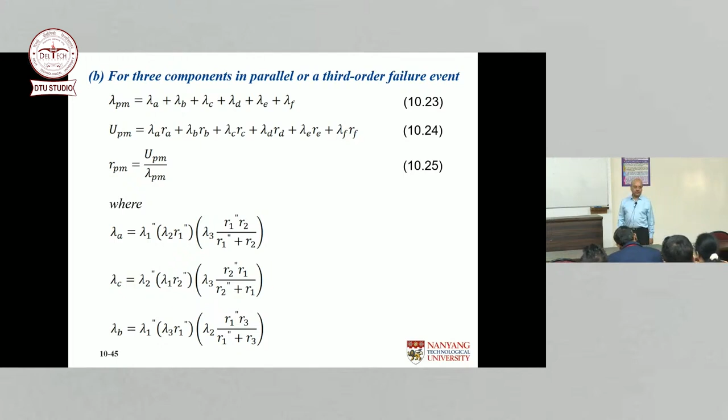Using those equations which we have also seen before, for 3 components in parallel there are also equations - I remember having explained to you the other day, this one as well. It's the same argument: component 1 on maintenance, and then component 2 fails during the maintenance time of component 1, and while component 2 has failed, component 3 also fails during the overlapping time of maintenance and forced outage of component 2.

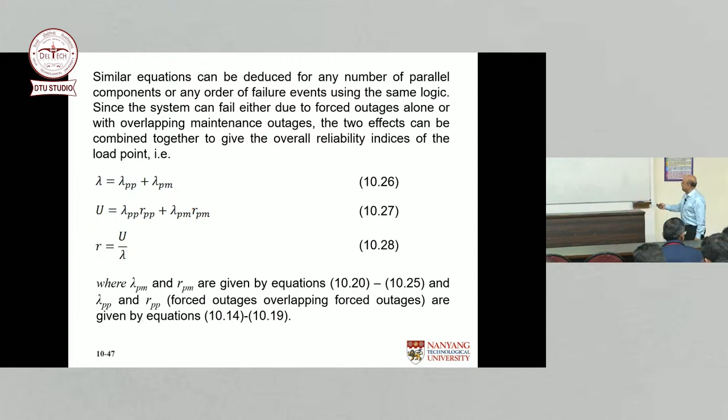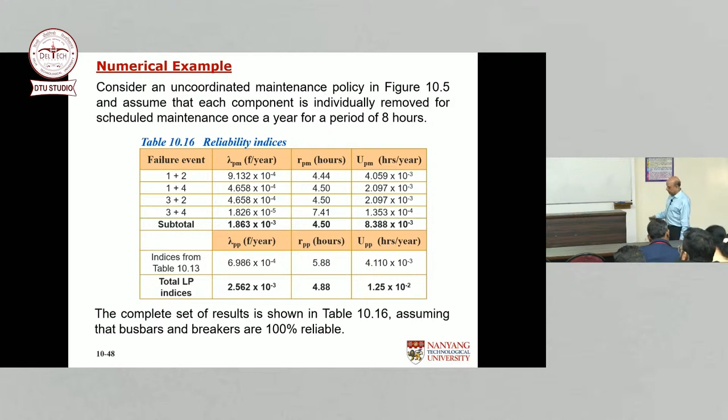Not very hard, it can be done, particularly for simple systems. It can be easily done using hand calculations. So I just thought last night I should share with you some examples of maintenance and ring system, meshed system, rather than just stay with radial. Don't want you to go away with the impression that everything is radial. Certainly not. Okay, I think this is it if I'm not wrong.